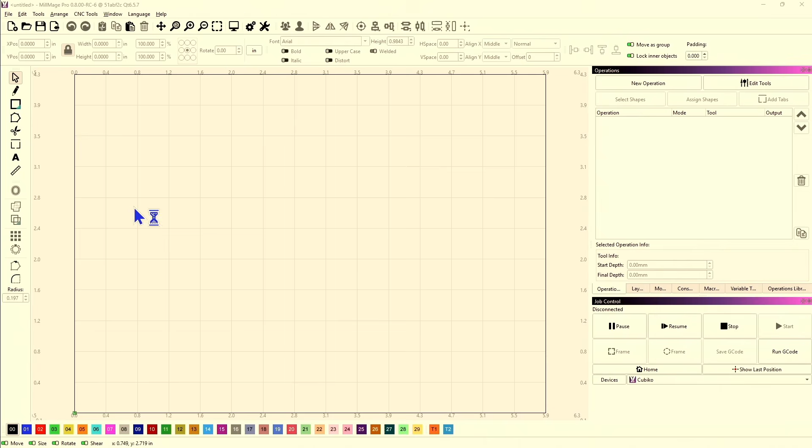So I've got MillMage open. And if I come over here to my Edit Tools button, you can see I have no libraries and no tool information. So I need to set up something.

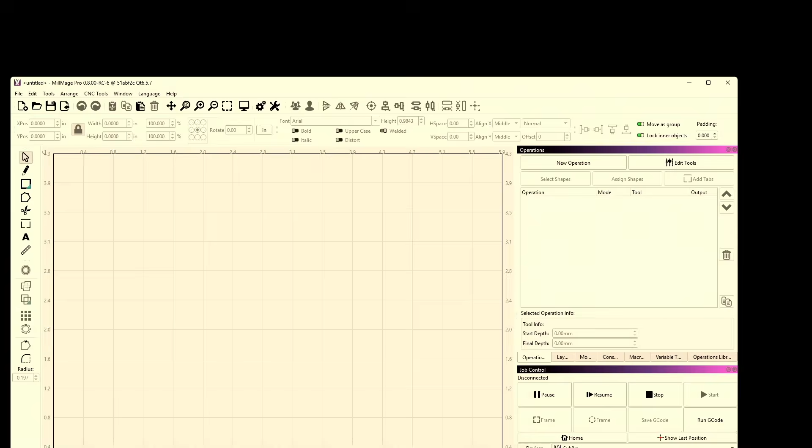But before I do, I'm going to go ahead and set up my split screen. And to do that, I just drag that down to where now it's not docked in its home position, and then I take this and drag it over and off the right side of the screen until, there we go. Once that gray area populates half of the screen, that's telling me it's going to populate that half.

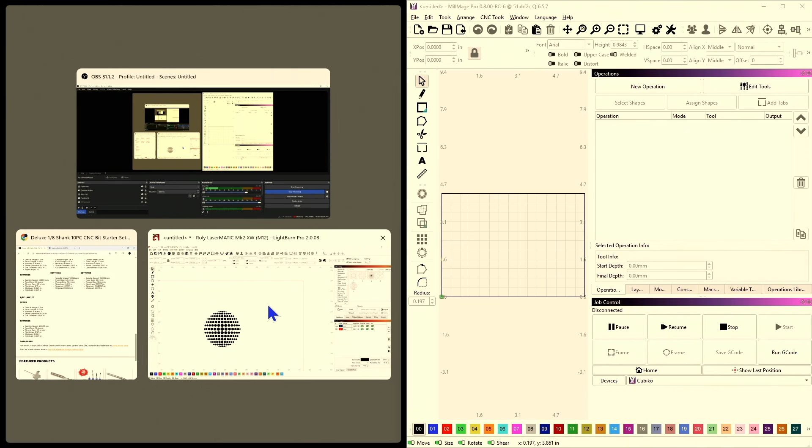If I took it down, you can get partial screens, but I want it to be half right there. Then it's going to show me what my options are. Well, here is my IDC Woodcraft that I have open. This is the streaming or recording information, and then I've got a version of LightBurn open. Well, I want this screen right here, so I'm going to click on it. And now that's going to give me the IDC Woodcraft website.

And if I go back up here to shop by type, shop by sets, this is the set that I purchased. I purchased this 10-piece CNC bit starter kit for the 1/8" shank. So if I click on that, then come down to here, specs and settings, here is all the specs and settings for that. And then here's, like I said, databases for Vectric, Fusion, Carbide Create.

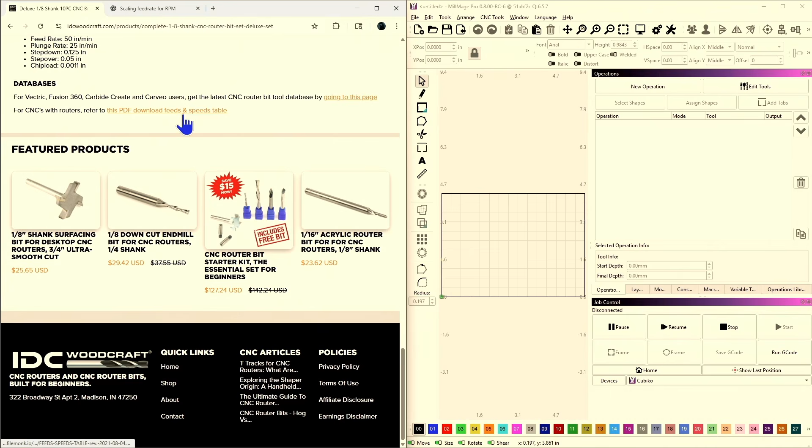I don't know what that one is. Carveo. Oh, there's a Carveo. I don't know what, or I thought there is. But then for CNCs with routers, use this. But we have a spindle with the Cubiko. Thank you. The Cubiko has a spindle.

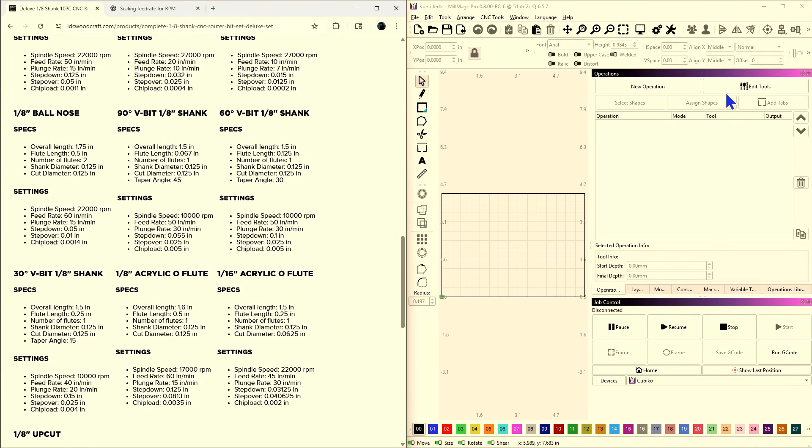So first thing I need to do is I need to come over here and select my edit tools. And I'm going to scroll down here, and there's my 1/8" Upcut Endmill. And so I'm going to bring that up there so I don't see none of the others. In fact, I could even zoom in if I wanted to and get that to come in real nice and big so everybody can see that real good. Where is it? It's at the very bottom. 1/8" Upcut Endmill. All right.

But I want you to look right here before we go. I've already looked down through here, and this is 22,000 RPMs as a desired setting spindle speed for these results. And spindle speed and chip load. This is a crucial piece of information when it comes to your bits. Chip load is really how hard you're working your bit. And if you get an excessive chip load, then you're overworking your bit.

So, since this is the specs for 22,000 RPMs and I can only do 20,000 RPMs, I need to calculate what that percentage is and then use that percentage initially across the board on my other settings, but that's not the absolute end result. Once we're done, then we need to go back and check and make sure that if we use that across the board, does it keep our chip load within that same window? If not, then we will have to make some other changes. So let's get back over here now.

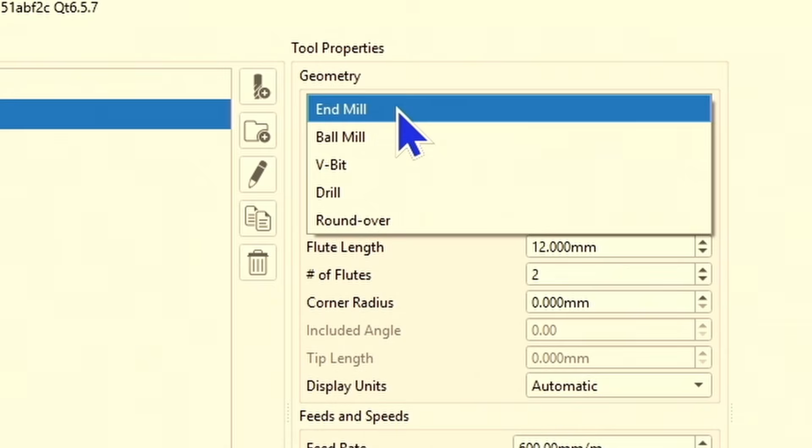I can select that, and now I have the opportunity to create a new tool in the selected category. And when I do, it populates some of this information automatically, but we're going to edit this. It's got geometry, and it autofills Endmill. I'm going to change this right here, the name. It's going to be 1/8 of an inch upcut. Got to move my cursor so I can see. Upcut. And I'm not going to label it Endmill because that's what it is. So 1/8 inch upcut. And the vendor, this is IDC Woodcraft.

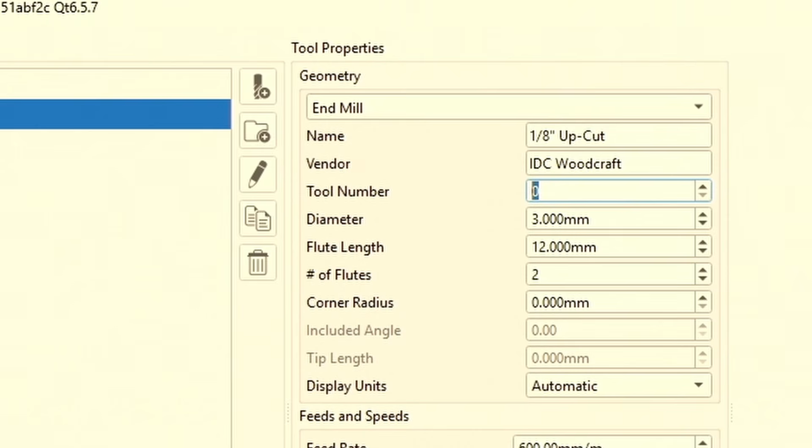Tool number. Now, there is no tool number, at least not that I see from him. And I'm not going to number it right now. If you have some of the fancy machines that do the auto tool change, that's where something like this would possibly come into play, or, which is something I'm going to do because I'm going to have so many bits.

I don't have one right here to show you, but I got a nice little box that I'm going to make to organize my bits in. So I'll put a raised floor with the 1/8 inch holes for my bits to be organized and engrave and label them. And then I can number them 1, 2, 3, 4, 5, 6, 7, 8. And so when I'm doing a job and I'm assigning this tool to this path, okay, I need tool number 3. So it's just helping me organize it. That's the way I'm going to be using that field. Right now, I'm going to leave it blank.

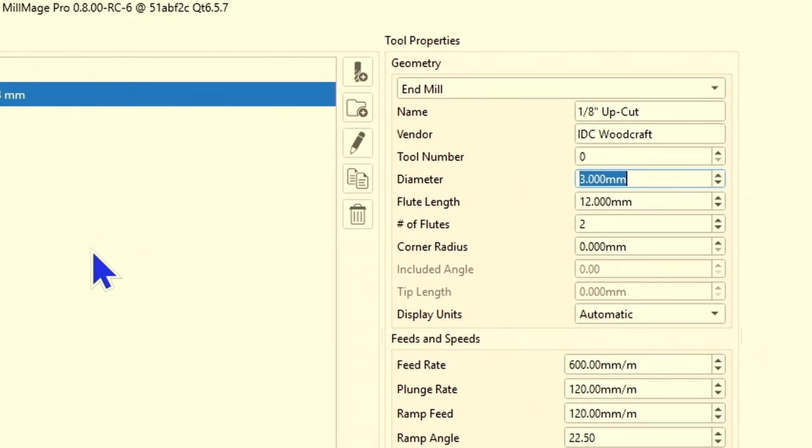Now, it's asking me for my diameter. And here, it's telling me 3 millimeters. I think that's just the default. But if I look at the shank diameter, he's got 0.125 inch or 1/8 inch. This is in millimeters because that's how I have my machine preference set up. Well, I don't need to worry about inches or millimeters right here. I'm going to put in 0.125, and then say inches, using the quotation mark. 0.125 inches, and enter. And it will automatically do the conversion for you to 3.175 millimeters.

I'm going to come down here to the flute length, get rid of what's in there, and look. He has a 0.75 inch or 3/4 inch flute length. So I can say 0.75 inches, with the quotation mark, and it'll convert it. There's my flute length of 19.050. Number of flutes is 2.

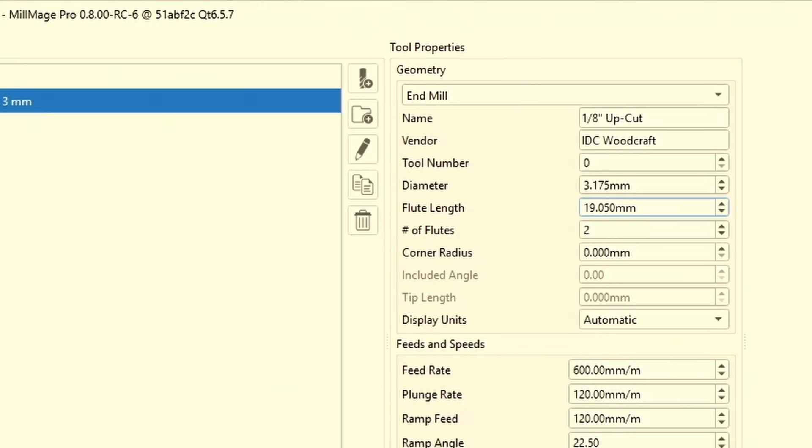Corner radius. There's no mention of a corner radius, and that might be something you might see with V-bits. I don't know. I'm still learning. I'm still figuring this out. There is no mention on IDC's website about a corner radius. So I'm going to leave that value blank. Corner radius 0. Then display units I'm leaving on automatic.

Feed rate. Now, we see over here he's got a suggested spindle speed for these settings of 22,000 RPMs. But I can only do 20,000 RPMs. So I'm going to set my spindle speed right here to 20,000 because that's as fast as my machine can go. Then I'm going to come back up here to my feed rate. Now, his settings are set up.

So far, all we've done is physical dimensions, the size and length of the tool, the cutting flutes, and all of that. Those are not speed dependent. They are a fixed value. The rest of these values are dependent; the speed of the spindle is going to vary these other settings.

So let's figure out, since we can only do 20,000 RPMs and he's got it set at 22,000, what percentage is that? Well, that's easy. Let me get over here. We'll open up the calculator. 20,000 divided by 22,000, and it's 91%. All right, I'm going to go with 90% of the value. That's the number I'm going to use for this tool for my setup.

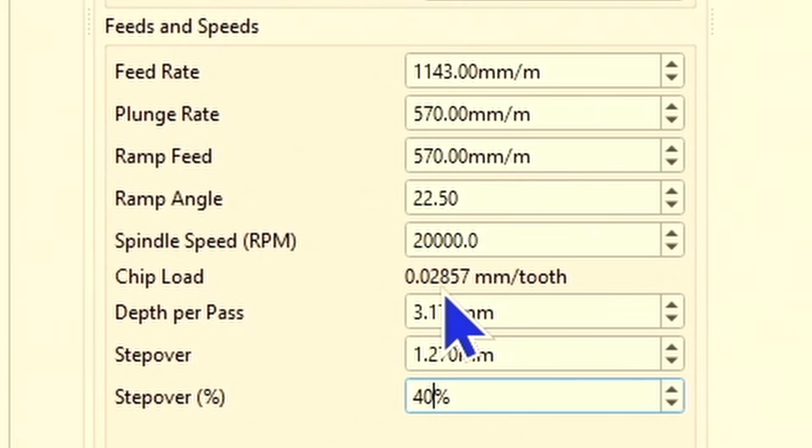Now, we filled all those fields in. But is it right? Because we had to do 90% of the RPM of the spindle, we had to do the backwards math to figure out our feeds and speeds, but we didn't check our chip load. And that's what we need to do now. Here in Millmage, as you're putting in all this information, right here, you cannot edit this field because it's doing the calculations for you. It's telling you if you do this feed rate at these speeds, this is your chip load. You're putting in a 0.02857 millimeter per tooth chip load.

Now, over here, he's got a chip load of 0.0011 inch. Well, we need to calculate what that is. So 0.0011 times, what's our conversion? 25.4. So his chip load is 0.02794. We have 0.02857. So our chip load right now is higher than his recommended chip load. So we can do one of two things I can think of right now to adjust for that. We can reduce our step over, or we can slow it down.

Let's look at both and see what happens, because I'm pretty sure either will work, and either one's going to affect the overall time of the carving of the job, because if you slow it down it's going to take longer. And if you take out less material per pass, it's going to take longer. So either one's going to increase our work time. But right now we want to make sure we're not overworking our tool. So first, the easiest one to check is let's just go in here and slow it down and take a look and see what it does.

So right now we got 0.02857 at 1143. Let's change this to 1100 even. 1100, and that brought it to 0.0275, and he's 0.0279. So here at 1100 millimeters a minute, we only lost 43 millimeters a minute, or about 2 inches a minute, give or take. I think that's right. So didn't lose a whole lot there, but let's bump that up to 1120. That's 0.028, and he's 0.0279. And to be safe, let's just say 1100. We'll leave it there. Because there at 0.0275, we are just under his.

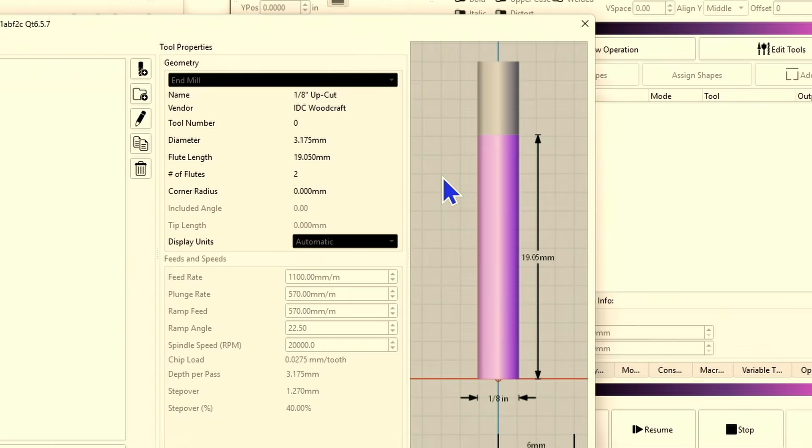So it kind of helps you visualize whenever you're looking at, okay, well, I'm going to step over half of its diameter. Okay, well, I can see that. What is half? I like it. And especially once you start getting in here and we start setting up some V-bits. Because right now the end mill is pretty cut and dry. It's just a straight cylinder that cuts.

Your V-bits, however, they're coming to a point. And why is that? How is that different? Well, with that coming to a point, say if it's a 20-degree 1/8 of an inch V-bit, well, it comes to a very fine point. If you come up 1 millimeter, well, now it's so wide. If you come up 3 millimeters, it's even wider. So being able to see when you're taking your plunge depth down on your V-bit, the further you plunge, the wider your cut's going to get.

So if you want to keep a real fine, detailed line, well, then okay, I know I don't need to go cutting too deep, because you can't go any wider, of course, than the width of your end mill. So if you've got a 3 millimeter end mill or an 1/8 inch end mill, the widest that cut's going to be is an 1/8 of an inch. But if you only wanted less than that, then you would need to know by looking at that profile on this bit how far. You don't want to go any further than this. So, all right. So that's setting up.

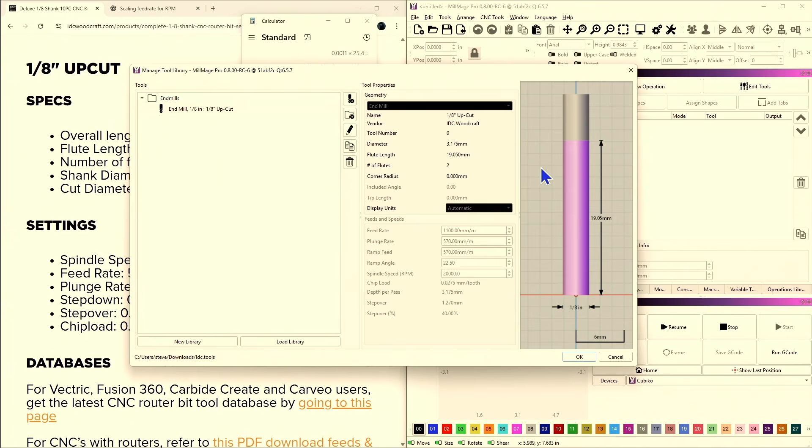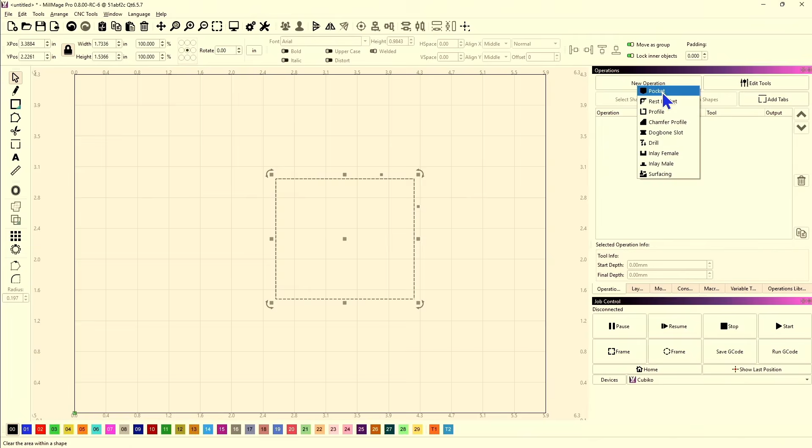Let's go back over here and say OK. So now let's make this full screen. There we go. If I was to come in here and set up a path, and then I'm going to assign it an operation. In fact, I'm going to carve this whole thing out as a pocket, which you wouldn't want to do with this bit. But let's say I was going to. I'm going to tell it I want a pocket here.

I need to select my tool. I'm going to select this tool. Why? Because it's the only tool I have set up right now. So I've got that tool set up, and I can say OK. Now I come over here and I set up what my instructions are for this pass, for this pocket. So my starting depth, because I'm going to set my z-axis 0 at 0. The final depth, I want it to be, we'll say 6 millimeters.

There's my depth per pass. My ramp, what type of ramp do I want it to be? Do I want it to zigzag in or plunge? I'm going to go with plunge. So it will just go straight down but at a ramp. Oh, no, wait a minute. Oh. Number 2, I just learned another thing.

Entry type. You can do a zigzag ramp, or you can do a plunge. So when I've got zigzag ramp turned on, it's going to ramp in at a 22.5-degree angle. But if I do a plunge, it just goes straight down and plunges. And we set that up with its plunge rate, so we're good.

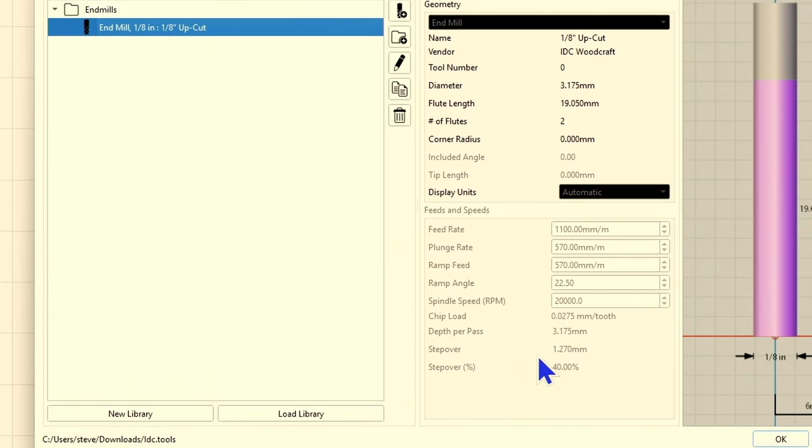Yeah, it's there. That was its default, 1.27. So okay, that's its step over. You could change it here if you wanted to. I don't know why you would, because we've got the optimum settings in there. So yeah, it was 40% step over, 1.27 millimeters. We're doing a total 6 millimeter pocket with the maximum depth per pass of 3.17.

We did a plunge entry. Here's our type of clearing pattern. Do you want to do an offset pattern like this, or do you want to do a raster, not vector? Raster is going to make it go back and forth, back and forth, and then a final cleaning cut. And your outline pass can be before or after or no outline. Now, me personally, I want mine after. So I'm going to do my raster cut, all the movement, and then once it's cleared out that pocket, go back and do a final cleaning cut.

And I've still got to figure this one out. This one I'm not sure about in Millmage. If you know, put it down in the comments. Let me know. Help me out.

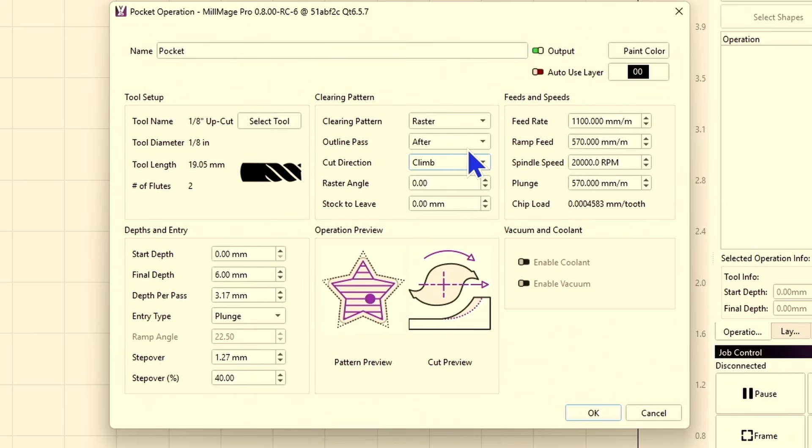This is cut direction, and it's asking me if I want to cut on a climb or on a conventional. Now, I don't quite understand this. This is an upcut end mill. Cut on the climb or cut on the conventional. I'm looking at the images here. Conventional. I don't understand that one. I'll have to do some more research, and like I said, if you know, put it in the comments. I'm going to leave that at conventional.

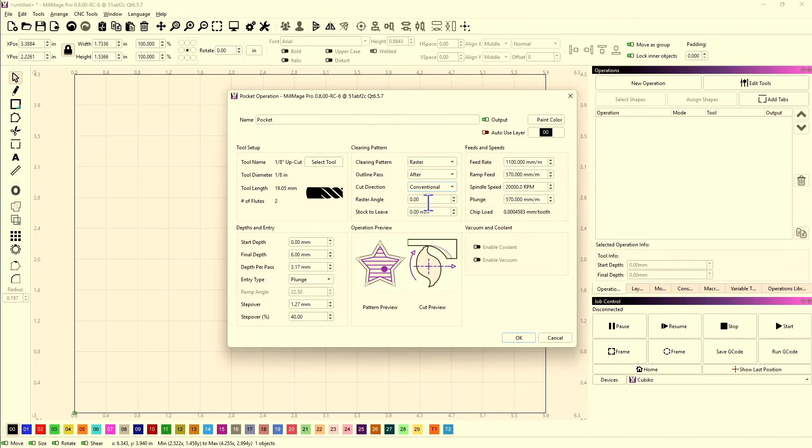Raster angle is 0. Now this would be like your scan angle on your laser. If you wanted to scan at an odd angle, at 22 degrees or at 90 degrees or whatever, you can change the angle in which your machine will work. Now, I think your raster angle of 0 is going to be your most efficient, because there you're moving on the x-axis back and forth, so you're only moving in one direction.

If you change that to a 90, now you're still moving in one direction, but depending on your setup, you might be, well, that's still only going to be moving the base. I'm looking at the Cubiko. The base, the y-axis, the actual base moves. The x-axis, the spindle moves. You're moving less mass and less material on the x-axis with the Cubiko. So I'm going to stay with the 0 degree on my raster clearing.

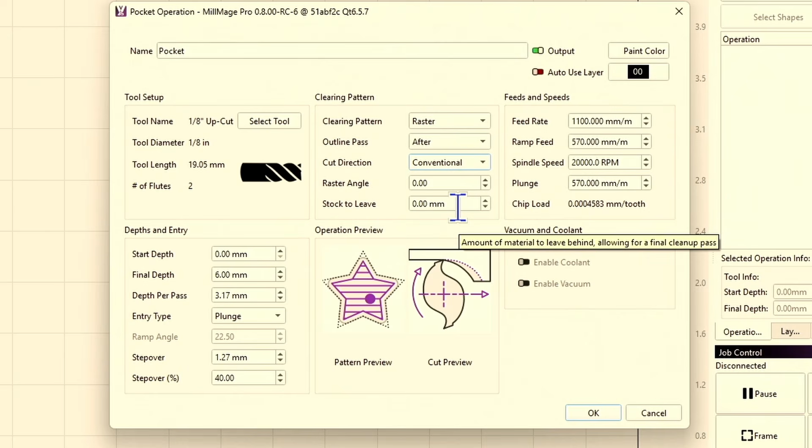So raster, doing an outline after. Conventional, raster angle 0, and amount of stock to leave. It says amount of material to leave behind, allowing for a final cleanup pass. So if I knew that this was my roughing end bit, I'm not going to tell it to go to the final depth to begin with. So if I wanted a 6 millimeter pocket and this is my rough end cut, I'm going to probably tell it to go 5.5 millimeters. But that's what this stock to leave would be.

It's like, okay, you want a 6 millimeter pocket and you're roughing it in, so leave an extra 0.5 mil. So it's just going to back it off a bit. Then you can go back in when you switch out your bits to your final bit for cleaning, to get that really fine, smooth finish. Like maybe you're doing a ball end mill or something, and it's going to give you a much better finish pass.

All right, so there's what I know, and it's limited. I'm learning, but that's setting up your first tool in MillMage. Now I need to go set up a whole bunch more and do all the calculations and get ready to do my first project with my IDC Woodcraft end mills. Yay! I'm silly, I know.